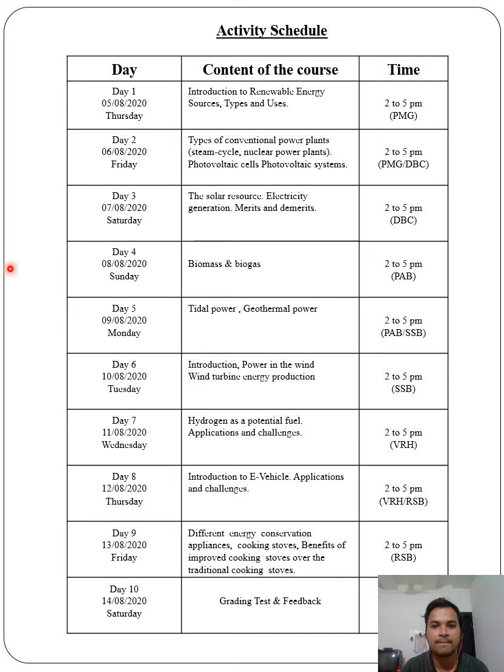So these are the things, basically starting from day one. This is day one of the 5th, that is today, 5th August 2021. It should have been, but it's fine. So these are the contents, and it can go ahead.

I am simply introducing you to these things, regarding the introduction for renewable energy sources. First of all, as we can see this thing.

So, renewable energy sources we have. First of all, what are actually the renewable energy sources? I hope you might all know. So what are the renewable energy sources? Let us simply get on to the process, meaning what are renewable energy sources and non-renewable energy sources? And also, one might have something different, some idea regarding this.

One might have an idea regarding conventional and non-conventional sources, then renewable and non-renewable sources, and have a clear idea regarding this. Let me tell you that a renewable source is something that we have to actually know about with a really clear idea. The terms non-conventional and renewable energy sources, and conventional and non-renewable energy sources, are a bit different. So before getting into it, let me just tell you what we are going to study.

First, I am going to deliver an introduction regarding this. Then, as we proceed day by day into the certificate course, we will venture into more deeper things. Like first, we have introduced this: what is renewable energy sources, and how good these are. Then after that, we will see a few more things, and in more depth as well.

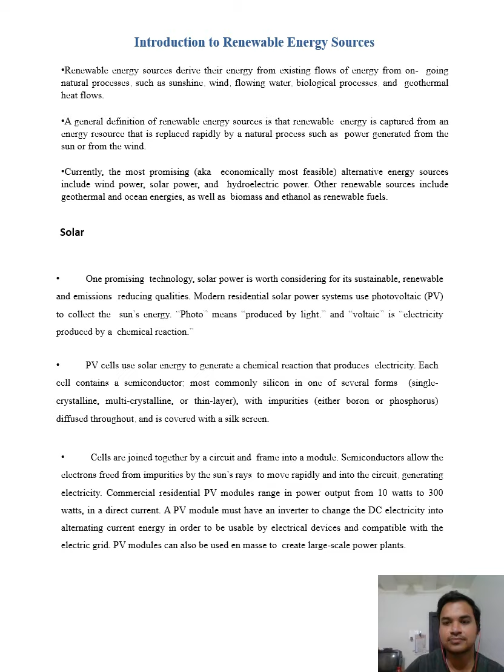You will be explained this in detail by Chennekar sir also in the upcoming lectures. So these are the things you have to keep in mind. I hope this is really very clear to you all. Going ahead,

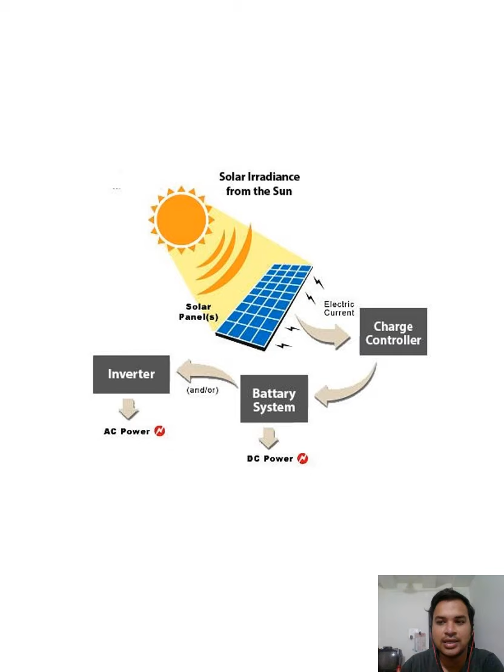We will now see the concept of wind energy. We know what the concept of wind energy basically is. Wind energy is the energy that actually flows. Everyone is well aware about wind or air, or storm - these are a few names for wind that we know.

Wind is a more advanced version of breeze. Breeze is something lighter, air flowing in a very mild way - that is called breeze. And wind is a bit stronger version of breeze, meaning the breeze flowing more intensively can be termed as wind.

Storm is the most advanced version of breeze, wherein you can do nothing about it, and it is of a very heavy magnitude. That is storm. So that is what wind, breeze, and storm actually are.

Usually in terms of usage of this energy, we term it as wind energy. Wind energy is one of the most promising alternative energy technologies of the future. Throughout recent years, the amount of energy produced by wind-driven turbines has increased exponentially due to significant breakthroughs in turbine technologies, making wind power economically compatible with conventional sources of energy. These are the conventional sources of energy, and this is the turbine technology we have to use with these things.

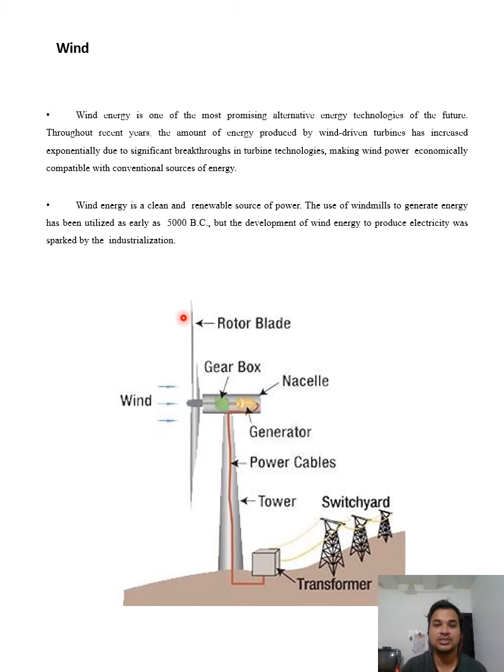So we're coming to the next slide. A question that can really come to mind is, where does this wind come from?

Wind is basically a form of solar energy caused by the uneven heating of the atmosphere by the sun, irregularities of the earth's surface, and the rotation of the earth. Irregularities of the earth's surface means somewhere you will find the Himalayas, about 8 kilometers above sea level, and somewhere you'll find the sea at 0 meters. So basically, this is uneven heating of the Earth's atmosphere.

Because of this irregularity, the wind will certainly flow, and the rotation of the Earth is also one of the main causes for the wind to flow. The amount and speed of the wind depends on the Earth's terrain and other factors.

Wind turbines use the kinetic energy of the wind and convert it into mechanical energy, which can then be converted into electricity by means of a generator. So when the wind blows, its kinetic energy is used by the turbines to produce mechanical energy, which is then converted into electricity by a generator.

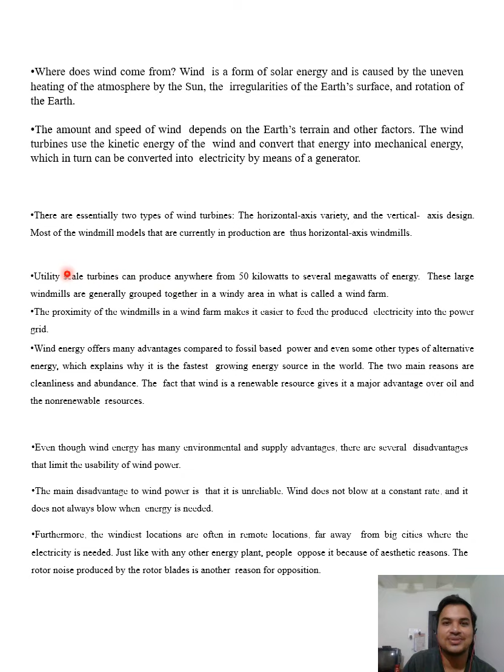Now let us see about hydroelectric power. Hydro is a Greek word meaning water, and the way we use it to generate electricity is called hydroelectric power generation. So basically this is all about hydroelectric power generation.

Hydroelectric power is more reliable, efficient, and economical. The concept behind hydroelectric power is fairly simple and has been in use for a significant span of time. The earliest reference to the use of this energy from falling water, based on the Greek word, is from Antipater in the 4th century BC. This falling water is referred to as hydro in Greek language.

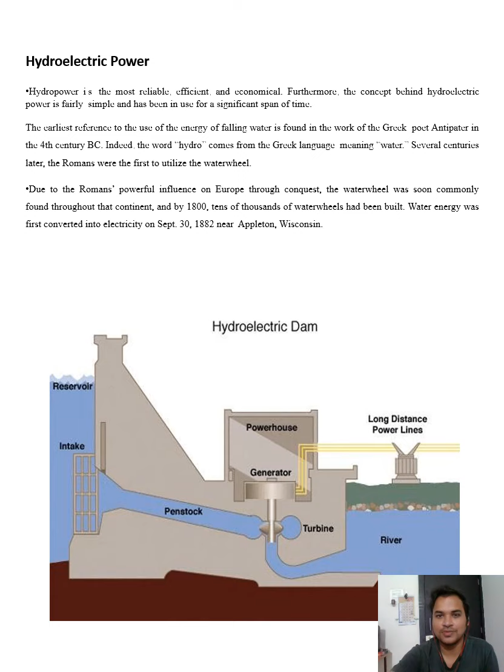Harvesting energy from water is possible due to the gravitational potential energy in water. As water flows from high potential energy, meaning high ground, to lower potential energy of lower ground, the potential difference created can be converted into kinetic energy, and in this case, electricity. The potential energy of stored water at a great height is converted into kinetic energy by rotating the turbine, and it is converted into electricity generation.

The water wheel discussed in the beginning is currently no longer in use and has been replaced by the far more economical and efficient dam. First, it was simply a water wheel, used to make water fall from a smaller height, which gave smaller quantities of electricity.

But when water fell from a great height, it gave a large quantity of electricity. Hence it was thought that if we could replace the water wheels and make the water fall from a greater height, we could definitely have a great amount of energy or electricity generated. That was the purpose or motive behind making the dam a success.

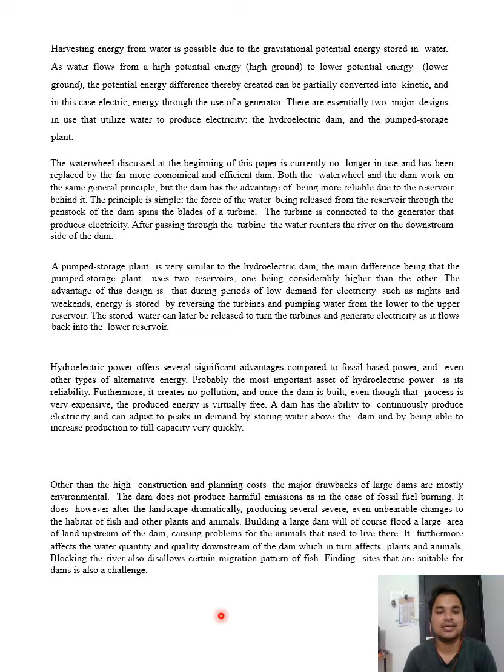This was all about hydroelectric power generation, its advantages and disadvantages discussed. Now we shall see geothermal energy.

So now we shall see how this geothermal energy is used, and again how this is a renewable source of energy. Geothermal, what is geo? Geo is something related to the earth, and thermal means heat. So the earth's heat is used to generate electricity here. Geothermal energy is one of the only renewable energy sources not dependent on the sun. Instead, it relies on the heat produced beneath the surface of the earth, as mentioned.

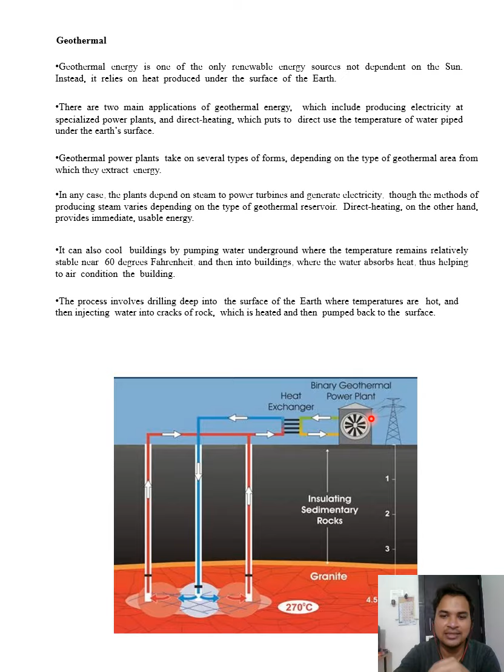By a geothermal energy plant, with the process of this heat exchanger, if you have to heat anything, you can make use of this heat from the ground, underground of the earth, for heating purposes, or you can use the heat to rotate the turbine and generator, producing electricity. So this is basically all about geothermal energy.

So we saw this about geothermal energy, and now let us see a few things regarding biomass also. So what is biomass? Biomass is also a clean source of energy that can be really used for various purposes.

We actually come across biomass in our day-to-day life. So what is this biomass? Biomass is basically nothing but leaves of a tree fallen on the ground. Then we see agricultural waste - agricultural waste is something like the crops that are no longer of use, meaning the harvested crops.

Then the sewage that comes out of toilets - these are natural processes a human has to really go through in his daily life, and the sewage is also a form of biomass. Then municipal solid waste.

Municipal solid waste means the garbage we throw into the garbage collector vehicle that comes daily to our house. We separate it into dry garbage and wet garbage. This separated garbage forms a part of our biomass.

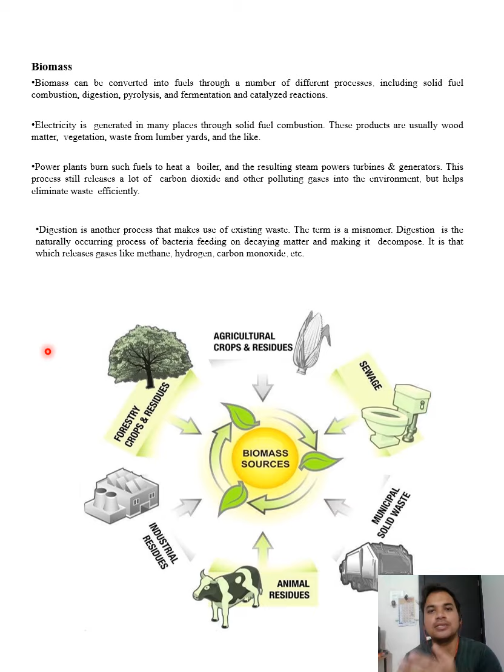All this matter can be used to generate electricity, through power plants which burn fuels to heat a boiler, and the resulting steam powers the turbines and generators. This process still releases a lot of carbon dioxide and other polluting gases into the environment, but helps eliminate waste efficiently.

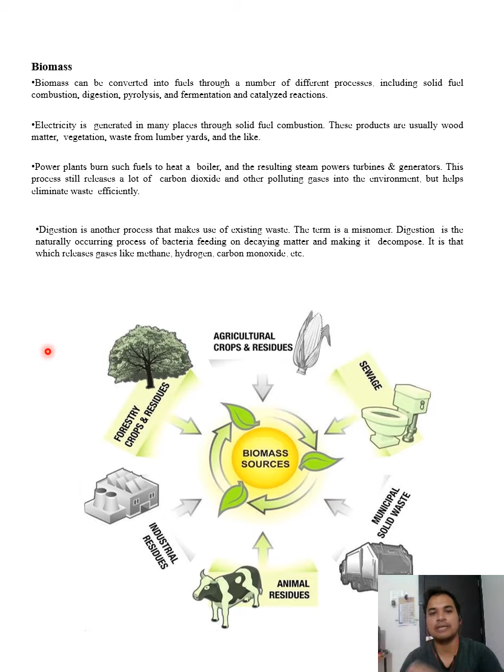In power plants we use coal, burning it to heat water so that steam gets generated, and that steam rotates the turbine.

In place of coal, you can use this biomass, so that you can burn this instead of coal to produce heat, which generates steam, so that it rotates the turbine and electricity gets generated.

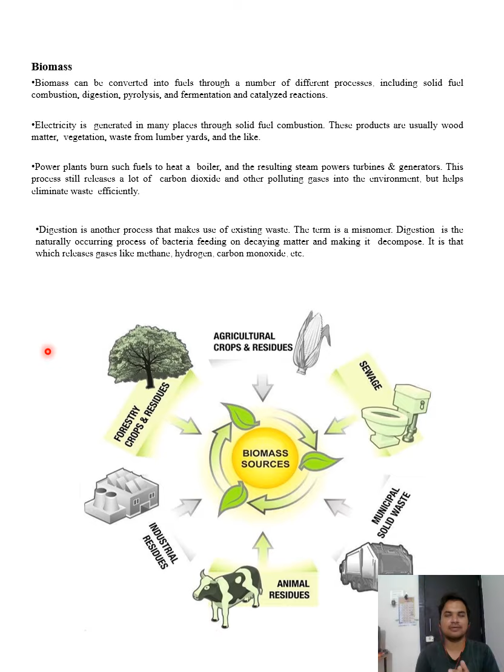One more thing is that it won't produce as many harmful gases as the burning of coal and other chemicals. Pollution will still take place, but not at that huge scale. So this biomass is one of the things that we can use to produce electricity and other things.

As I said, all these things are biomass sources. Sewage is also one biomass source, industrial waste is also a biomass source, agricultural crops and residues are also sources of biomass, while animal residues are also a source of biomass. I hope the biomass concept is clear, and we shall now advance to the next slide.

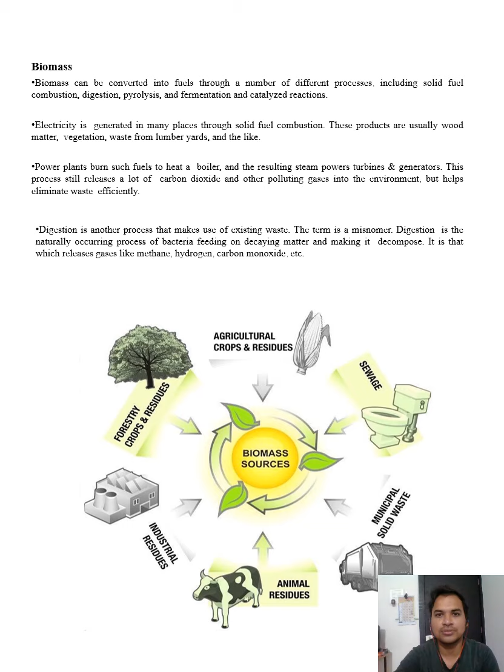Microorganisms, especially bacteria and yeast, ferment starchy sugar biomass products like corn, yielding ethanol, which can be used as fuel in a variety of applications. Biodiesel is an increasingly popular fuel, especially in the transportation sector.

Ethanol can be produced. Ethanol is a type of alcohol, with the formula C2H5OH. These yeasts and other microorganisms can ferment crops like sugarcane, corn, and other crops so that alcohol can be produced. This is one of the uses of biomass - you can use biomass as an earning source also.

Let's keep the earning source aside and focus on its energy use. You can also produce biodiesel from this biomass, which is becoming popular and is used in the transportation sector.

We know that oil is depleting. The oil that we use in our day-to-day life - petrol, diesel, and natural gas - these sources are depleting.

If we can use this biogas, or biodiesel, or directly use ethanol in our vehicles, then our reliance on petroleum products will certainly get reduced, and we will surely and steadily move into bioproducts. This will also be economical for us and may not be a financial burden, because day by day the fuel prices are increasing.

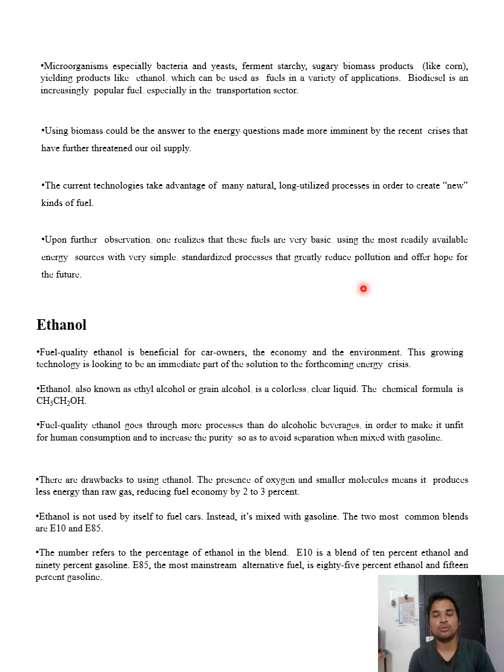But as mentioned earlier, if we process ethanol to its purest form, we have no need to mix it with gasoline. The problem then becomes how much procedure, time, and cost it will take to get it to that pure form. If the cost is increasing, there is no point - we simply make it 85 to 90% pure and mix it with 15 to 10% gasoline so our fuel purpose gets sorted. So one more thing to keep in mind is the economic consideration regarding the production of ethanol as a fuel.

So this was all about ethanol, its advantages and disadvantages, which we saw now.

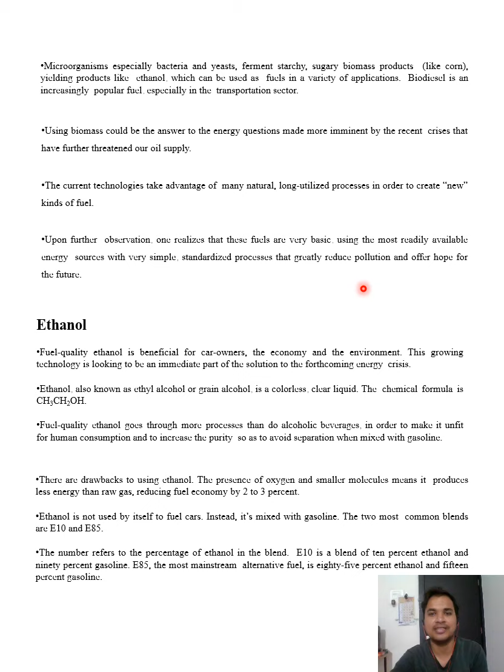Now we are going to slide number 12, the last slide, about ocean energy that I mentioned. In the case of hydroelectric energy, I spoke about water, and although in tidal energy or ocean energy - ocean energy and tidal energy are one and the same - they are not different.

As I mentioned in the case of hydrothermal energy and hydroelectric power plants, although we make use of water in both cases, in a hydroelectric power plant or hydroelectric power generation we basically make use of water falling from a great height, where the factor mgh, the potential energy height factor, comes into play.

Okay, so this was basically about hydroelectric power plants. In case of ocean energy, we simply make use of the tidal energy or the energy of the waves.

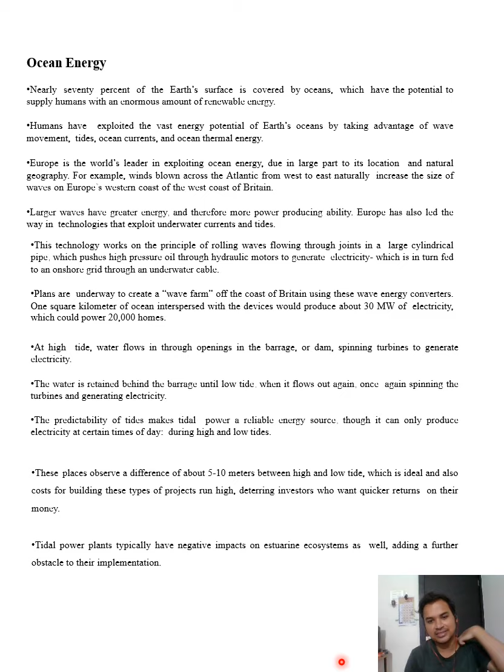So these places observe a difference of about 5 to 10 meters between high tide and low tide, which is ideal, but the cost of building these types of projects runs high, deterring investors who want quicker returns on their money. Because once you have got a 10-meter tide, and again if you have got very low, 2 meters high tide, then the electricity generation gets impacted. That is why investors, the people actually investing in ocean energy, are not getting that much interest, or not generating that much interest into this thing.

So they are not willing to put their amount, or put their financial energy into this thing. But still, government can take the initiative, and the government can provide subsidy to the private power generators, or it can simply establish its own power generation system at the ocean and encourage private players by giving them subsidy in this regard.

So this is basically what we can say about tidal energy. And tidal power plants typically have negative impacts on estuarine ecosystems, as well as adding a further obstacle to their implementation.

Estuarine ecosystem is the ecosystem of undersea sea life, which can hamper the sea life. Like in tidal energy, if you put underwater cables or underwater machinery into the sea, the sea life, the plants and animals, the flora and fauna, get adversely impacted. This can also affect that ecosystem, and this is one of the drawbacks of the implementation of tidal energy.